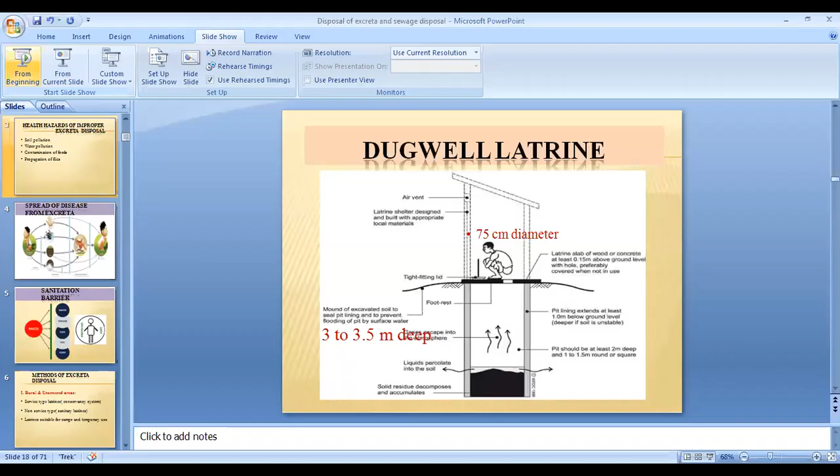Yes ma'am. Okay, so today we'll discuss the various methods of how we can dispose of human excreta. So why do you think this is important? Why should there be proper methods of disposal of human excreta?

For healthy living, yes, to prevent disease and ensure proper health and sanitation. Very good. Proper sanitation is also very important.

That's why nowadays we always encourage people to use sanitary latrines. Even the government has schemes where they provide people, especially in rural areas, with the basic materials needed to build a sanitary latrine.

Because as we all know, communicable diseases like diarrhea, dysentery, and cholera are waterborne infections. They spread because people do open field defecation near water sources, and from that water source the process of infection goes on and on. Because of this, proper disposal of human excreta is very important.

Indirectly, we also need this to prevent fecal-oral transmission, which is very common among communicable diseases like cholera, diarrhea, and dysentery. So in order to avoid all this and keep the environment clean and healthy, we always need proper disposal of excreta methods.

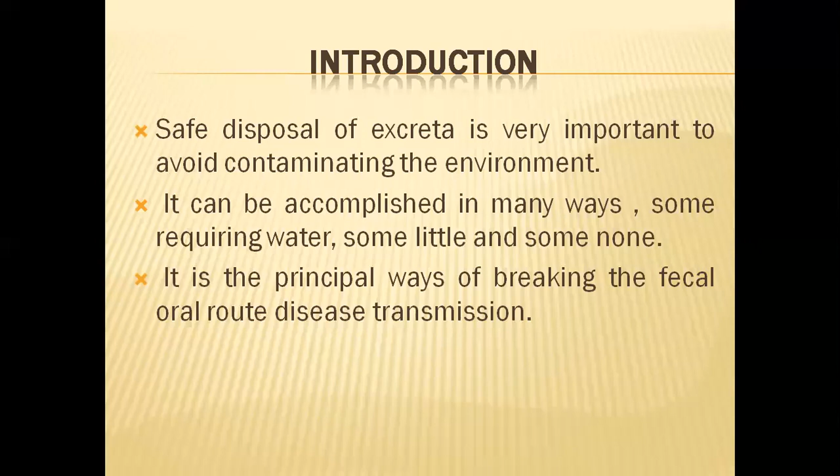Some of the health hazards of improper excreta disposal are soil pollution, water pollution, and it also contaminates food, because as you know, if people do open defecation, what happens?

The flies - through the flies, they carry it and contaminate the food. That's why we should also avoid it, as it acts as a propagation site for flies.

Anyhow, I think I don't need to explain this in detail, everyone already understands. So these are the health hazards of why we need to maintain proper human excreta disposal methods.

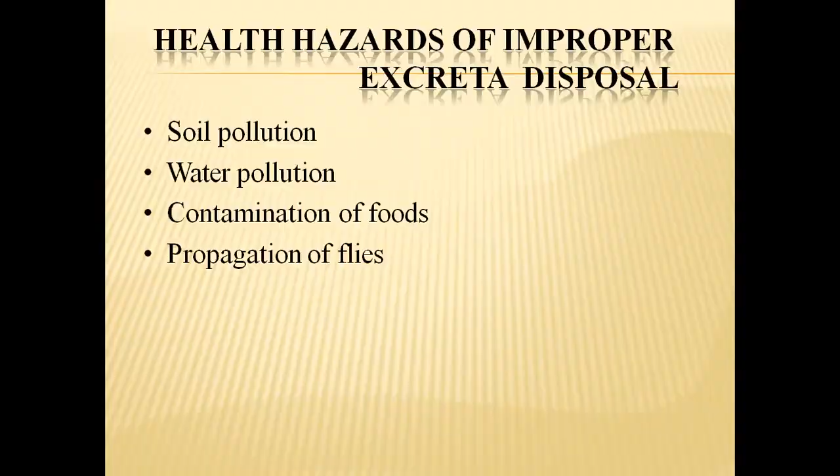Then through the flies, then also through the foods - in the fields, especially if they do it near the field area, it might contaminate the plants, and again through the field or to the water. So all this acts together as a source of contamination or the route of transmission of infection.

And after that, what happens? The person later on will develop various forms of infection.

Virus infection, or he might develop diseases like dysentery or cholera, and again he becomes a new host. So this is how fecal-oral transmission usually occurs. That's why proper hand washing, having a proper sanitary latrine, and avoiding open field defecation, especially near field areas and water sources, is very important in order to prevent fecal-oral route transmission.

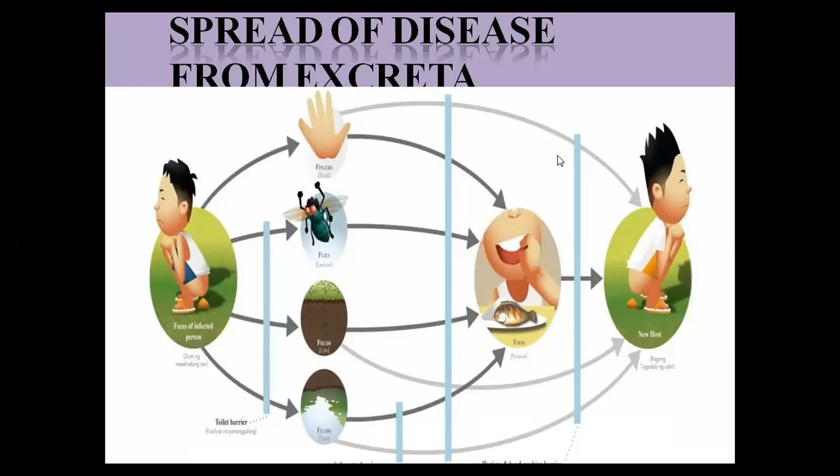So this is sanitation. What are the things we need to do? These are all sanitation barriers. First of all, after defecation we should always wash our hands properly with soap and water, and even before eating. By doing that, we are blocking the chain of transmission. Especially the fingers or hands act as a main source of infection, since we touch things here and there. So from time to time, we should always wash our hands.

Then, whenever we prepare any food item at home, we should always cover the food with a lid, which also helps prevent contamination by flies. We should always avoid open field defecation near the soil, which may cause soil contamination. Whenever we cook food, before cooking we should wash it properly under running water, and also make sure we cook it properly. That is also very important.

So these are all the barriers or methods to avoid fecal-oral route transmission. By doing all this, it helps in prevention of any form of fecal-oral transmission, what we call the sanitation barrier. Indirectly, these are the 5 ways we can also prevent diarrhea, since diarrhea is also mostly a waterborne infection, so we should follow all these practices.

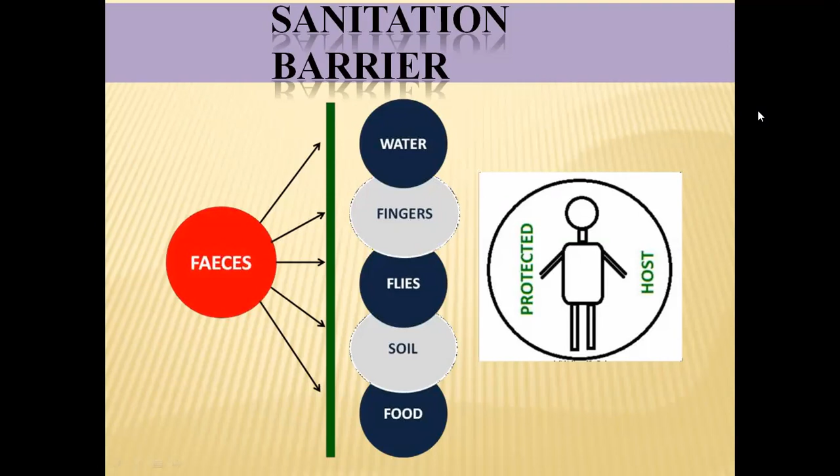So these are the various methods of excreta disposal. In rural and unsewered areas—meaning areas that don't have a proper pipeline or proper excreta management methods—these disposal methods are mostly seen.

Under this, we have 3 types of excreta disposal. The first is the service type latrines or the conservancy system, which is a very old or ancient method of managing disposal of human excreta. The second is the non-service type or sanitary latrines—sanitary latrine methods also keep changing as people develop new building techniques, which we'll see in detail. Then there are latrines suitable for camps and temporary use, which also come under this.

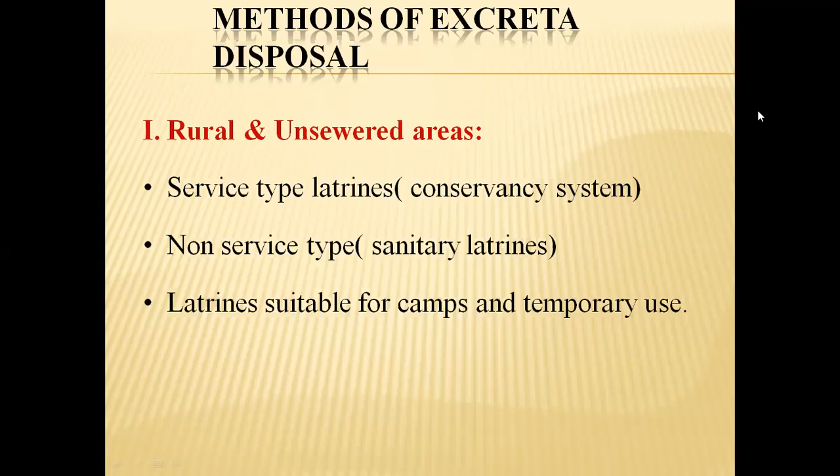Now let's look at the service type or conservancy system, also called the bucket system or bucket toilet system. Here, the night soil is collected from pail or bucket type latrines by a human agency, meaning workers such as sweepers. People keep the waste in a bucket at their own house, and this human agency or sweepers come and collect it from each and every house, and later dispose of it by burying or composting. This is a very old method that was done during ancient times.

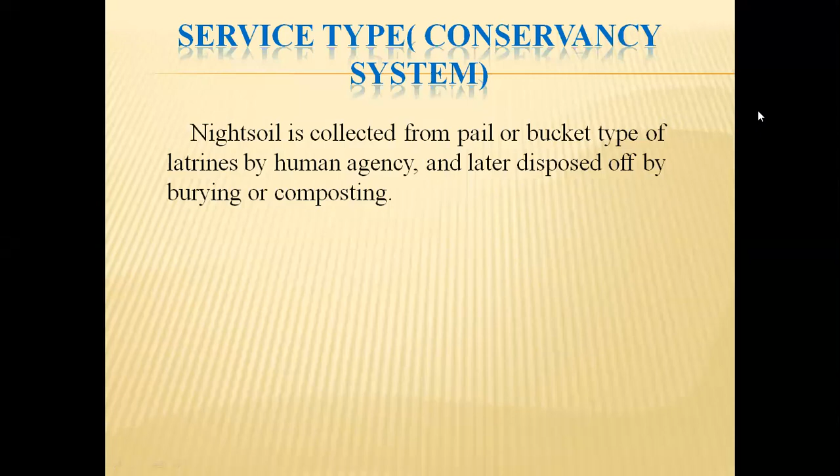Then under the non-service type or the sanitary latrines, we will be seeing the different types of sanitary latrines. We have the borehole latrines, dug well latrines, water seal latrine. Again, we have the PRAI system and RCA. These also we'll discuss later. Then Sulabh Shauchalaya, then we have the septic tank and the aqua privy. So these are the non-service types of sanitary latrines.

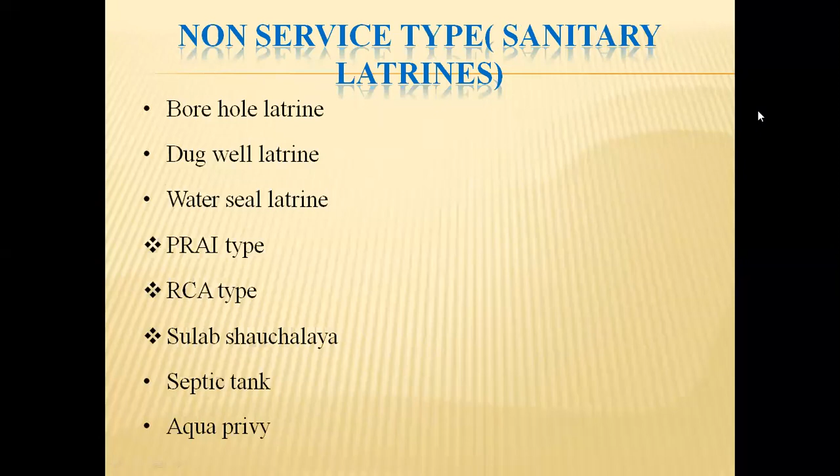And the latrines which are suitable for camps and temporary use. Under this we have a shallow trench latrine, then a deep trench latrine, pit latrine, and a borehole latrine. All these we will be discussing in detail one by one. So we'll see the first one, that is the sewered area.

The main difference between the unsewered and the sewered area is that in the sewered area we usually have a very good pipe system, meaning a very good water carriage system. They have a very proper method of sewage treatment. That is the main difference between the unsewered and the sewered area.

Here they usually do three forms of treatment: primary treatment, secondary, and the other methods. In the primary treatment, mostly they do the screening, removal of the grit, then the plain sedimentation. Under the secondary methods, we have the trickling filters and activated sludge process, and the other methods are like sea outfall, river outfall, sewage farming. And the last one is the,

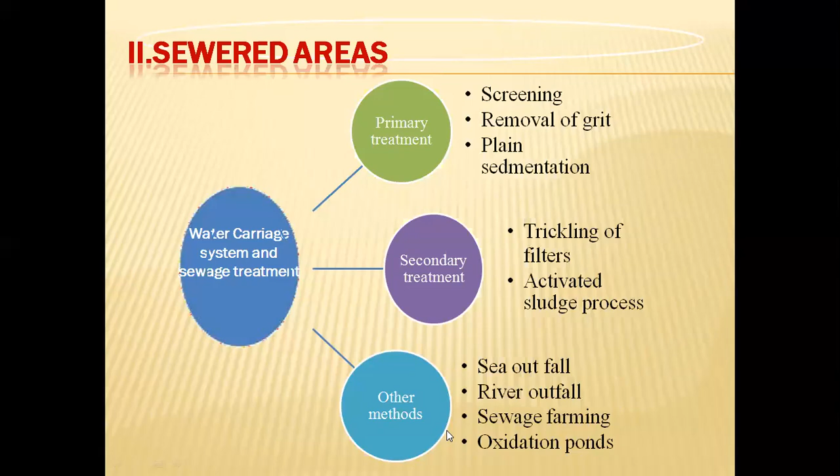Let's see once. Is the slide visible? Yes, okay, ma'am.

The last one is the oxidation pond. All this also we will discuss in detail one by one, so I'm not going into it now, because we'll discuss it later. So we will see the first one, which is the service type.

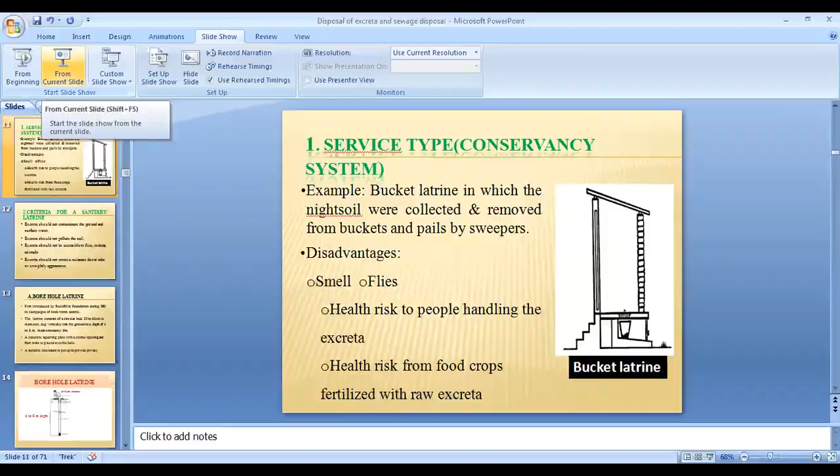As I've said, in the service type, as you can see, this is how people in ancient times used to manage human excreta disposal. In the photo you'll see there is a bucket. Every night the sweepers, or human agency as they used to call them in those times, would come and collect it from the doorstep of each and every house. This is how the system is done. This is also called the bucket latrine.

The disadvantages are that obviously it causes smells, it attracts flies, and it also acts as a health risk to the people handling the excreta. As you all know, there are so many health risks from excreta; previously I also showed the fecal-oral transmission. If they don't handle it properly, it causes contamination, and many infections can spread to the person collecting the excreta, the human agency.

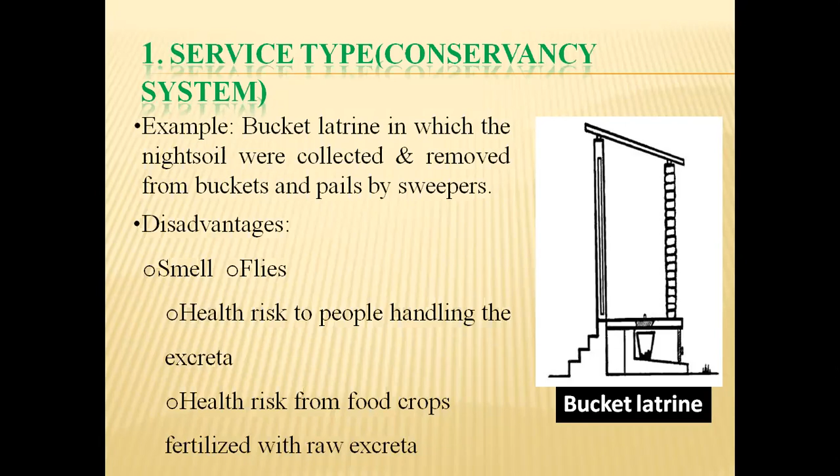Health risk from the food crops, because after they collected it, they used to dispose of it; either they dumped it or sometimes they did composting. This might cause soil pollution and can also affect the crops. So this is the first method under the rural or unsewered areas, called the service type, which is not followed nowadays. Everyone is now very advanced; even in rural areas many people have sanitary latrines. So this is about the service type conservancy system or the bucket latrine.

Then we'll see the second one, the sanitary latrine. Under sanitary latrine there are different types. For the sanitary latrine, there are certain criteria that a particular sanitary latrine should fulfill. The first one says excreta should not contaminate the ground and surface water, and the excreta should not pollute the soil.

So excreta should not be accessible to flies, rodents, animals, right? So these criteria are very important. Then only it will help in prevention of environmental contamination, right? Excreta should not create a nuisance due to odor or any unsightly appearance. So that's why if you see in any sanitary latrine, there should be a proper location, okay?

The depth of the latrine also should be accurate, so that it fulfills all these criteria, okay? There should be a proper coverage, then they should have a proper storage of all those excreta. So these things are very important, okay, in order for any latrine to fulfill these criteria. So they should have all this, okay.

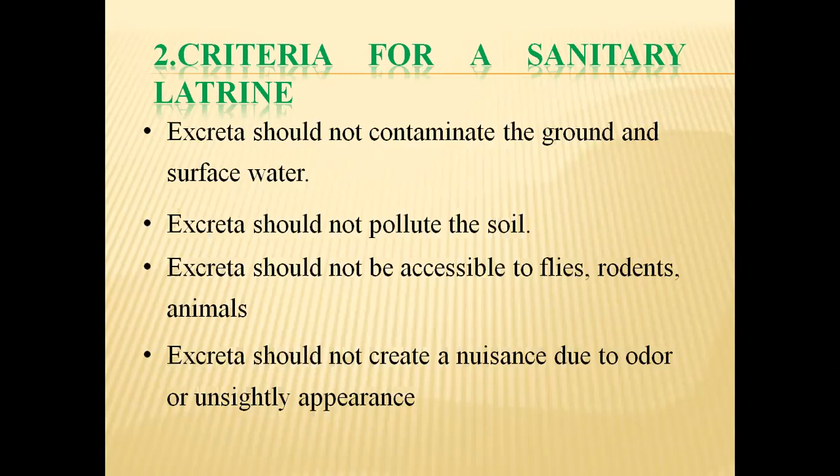So we'll see the first type of sanitary latrine, which is a borehole latrine. This was very commonly used during the previous days, okay. Even now some houses, even in rural areas, are still following these borehole latrines. This was first introduced by the Rockefeller Foundation during the 1930s in the campaigns of hookworm control.

Okay, because as you know, hookworm infestation, why does it happen? Because of soil contamination, right? And especially if people don't wear proper slippers, if they don't wash their hands properly, it causes infection. So in order to control that, during those days they started new ideas for how to control that. So they introduced this borehole latrine.

The latrine consists of a circular hole, 30 to 40 centimeters in diameter, dug vertically into the ground, okay, to a depth of 4 to 8 meters. Most commonly, up to 6 meters. A concrete squatting plate with a central opening and footrest is placed over the hole. A suitable enclosure is put up to provide privacy. That means like a door or a cover, in order to provide privacy for the person using it.

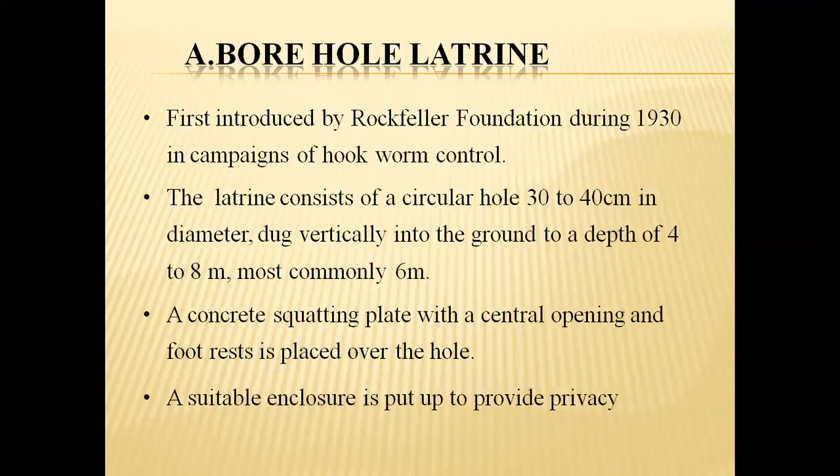So I'll show you the photo. Okay, so this is actually how a borehole latrine is built. As you can see, the person is sitting on a squatting plate. And it is around 30 to 40 centimeters in diameter, and the depth is 4 to 6, or even up to 8 meters. So this is how we can build a borehole latrine.

So this is actually a very good method, starting off the new advanced methods of human excreta disposal. It really helps in preventing soil contamination, okay, which is caused by open field defecation. So people started with this borehole latrine.

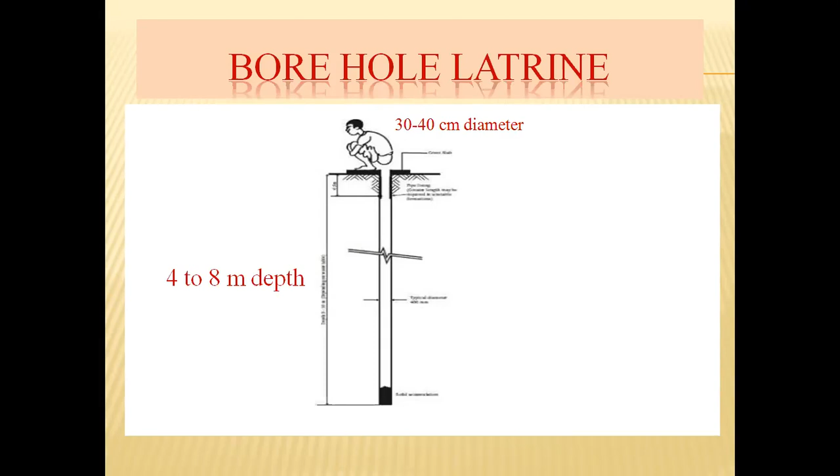Okay. So what are the merits, or the advantages of this? There is no need for the services of a sweeper, like we have seen in the service type, okay, which is named service type because for that we need some service, some agency or person, right? So there is no need for the services of a sweeper for daily removal of night soil. It is unsuitable for fly breeding as it is properly dug and properly built.

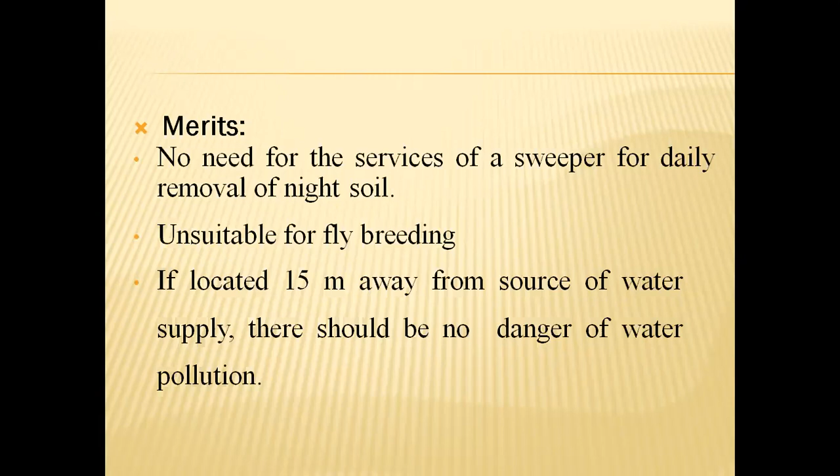If it is located 15 meters away from the source of water supply, there should be no danger of water pollution. Okay, so location matters. So make sure if you build this type of latrine, it is not built so near to the water source. Obviously, if it is very near, some form of contamination might be there. So location matters before building this borehole latrine.

A special auger is required for the construction, which may not be readily available, because we need to dig a very deep hole, right? Up to 4 to 8 meters. In many places, the subsoil water is high and the soil loose, with the result that it may be difficult to dig a hole deeper than 3 meters. So this also might act as a barrier or disadvantage of this form of borehole latrine.

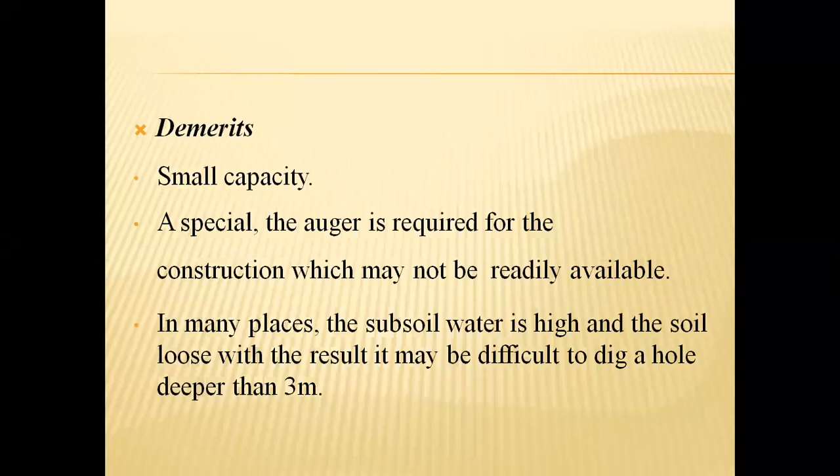So the next one is called a dug well latrine. It is a circular pit around 75 centimeters in diameter. This is also like the previous one. We have a pit, and it is 3 to 3.5 meters deep. In the borehole latrine, it is around 4 to 8. Here it is around 3 to 3.5.

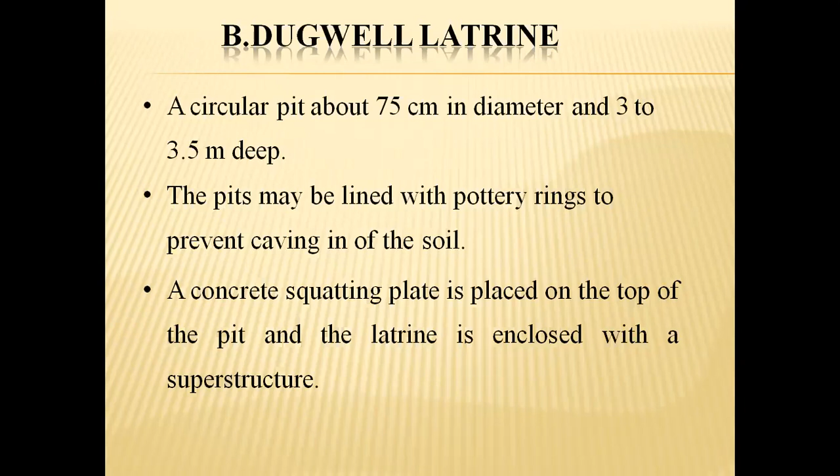The pits may be lined with pottery rings to prevent caving in of the soil. A concrete squatting plate is placed on the top of the pit and the latrine is enclosed with a superstructure. So this is how a dug well latrine can be built. It is almost similar to the borehole latrine. Just that the depth is not so deep. It is only 3 to 3.5, and it is around 75 centimeters.

And similarly, here also we'll have a squatting plate, which can be made of concrete. But nowadays we have this tiles type of squatting plate. So it can be built with concrete cement also, and it is around 75 centimeters. And also there is a footrest, which helps. Then we need some privacy also, right? So there should be some side walls. This is also important for privacy.

As you can see, there is an air vent, and the latrine shelter is designed and built with appropriate local materials. The slab can be made of wood or concrete, at least 0.15 meter above the ground level, with the hole preferably covered when not in use. Covering is important to prevent contamination by flies. So this is how we can build a dug well latrine. It is very similar to the previous one, just like an advanced design of the borehole latrine.

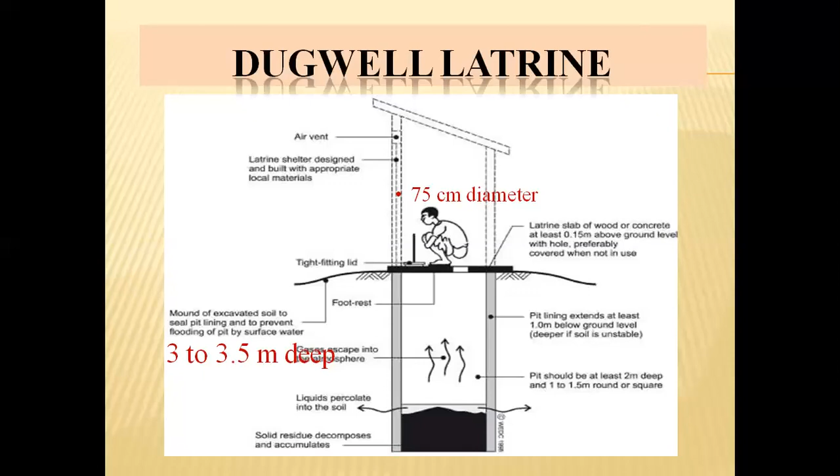So the advantages of this latrine are that it is very easy to construct, and no special equipment is needed because it is not that deep, only 3 to 3.5 meters. And the pit has a longer life than the borehole latrine because of the greater capacity. The width is more, so it can hold more as compared to the borehole latrine. So this is about it. Do you have any questions till now?

No, ma'am. Okay, so I think I will stop here for today. In the next class we will continue with the different methods of the sanitary latrine, because this disposal of human excreta is a bit lengthy. So we'll go slowly.

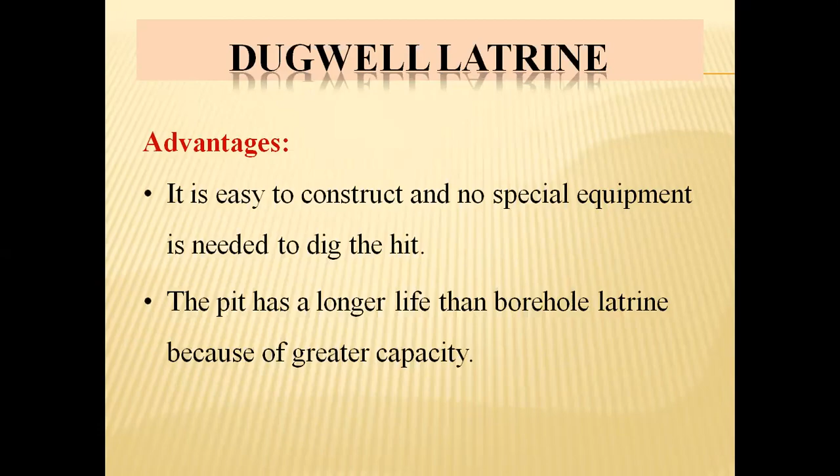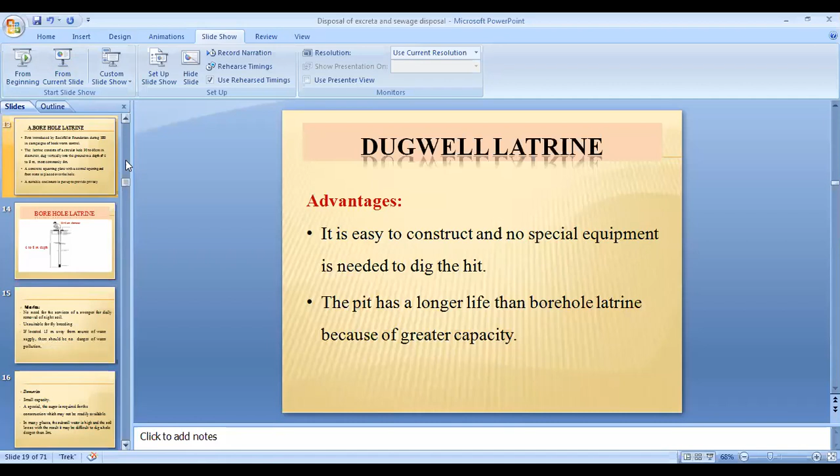So today at least remember this type. Under the on-site type we have seen the service type, and also the sanitary latrines. In the sanitary latrines, we have seen the borehole latrine and the dug well latrine. The main difference between them is that the borehole latrine is 30 to 40 centimeters in diameter, while the dug well is 75 centimeters in diameter. And the depth of the borehole is 4 to 8, while the dug well is only 3 to 3.5.